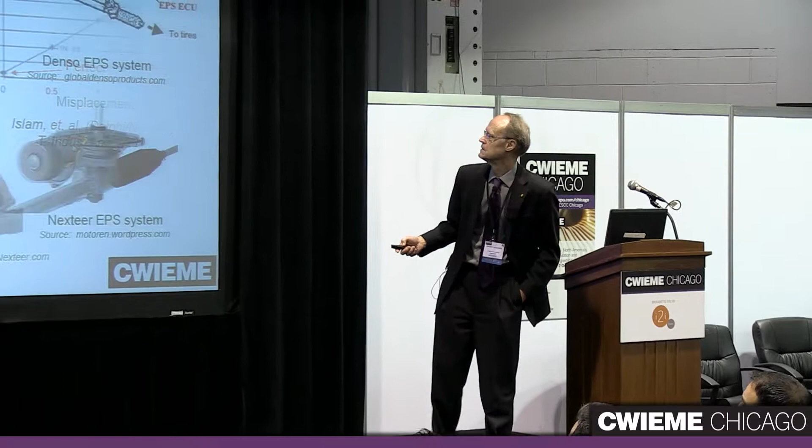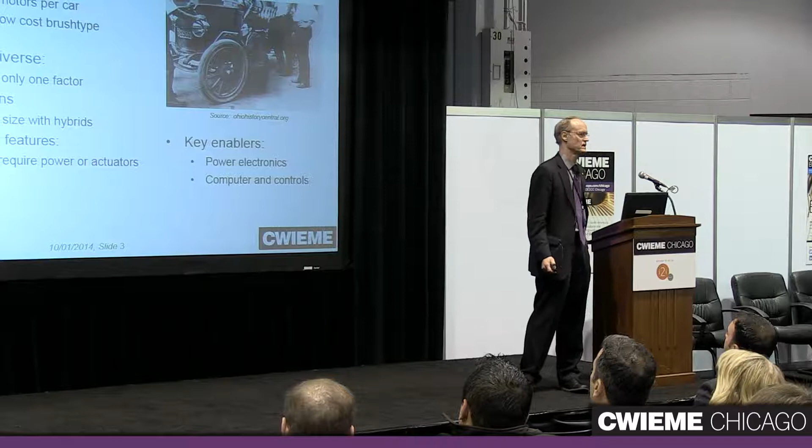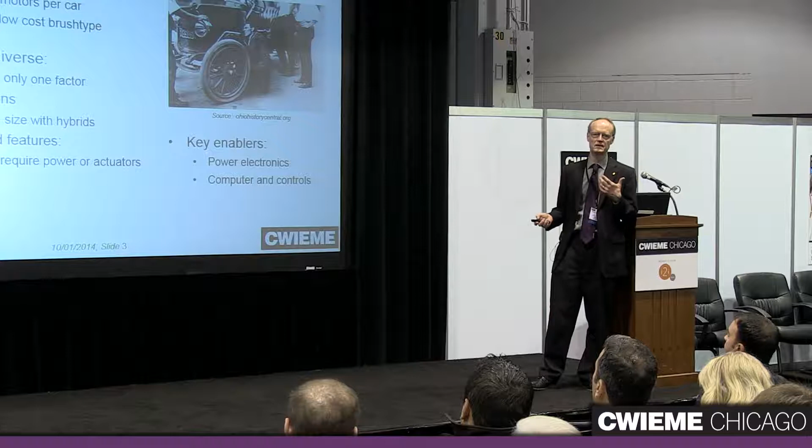Convenience and features motivate a lot of the electrification that takes place in the car. Up to now, there are a lot of small, very cheap motors. Now you are starting to see more sophisticated motors like brushless drives. And the key enablers really are power electronics and computing power.

In your car now, you have millions of lines of code. It's amazing how much computing power you have.

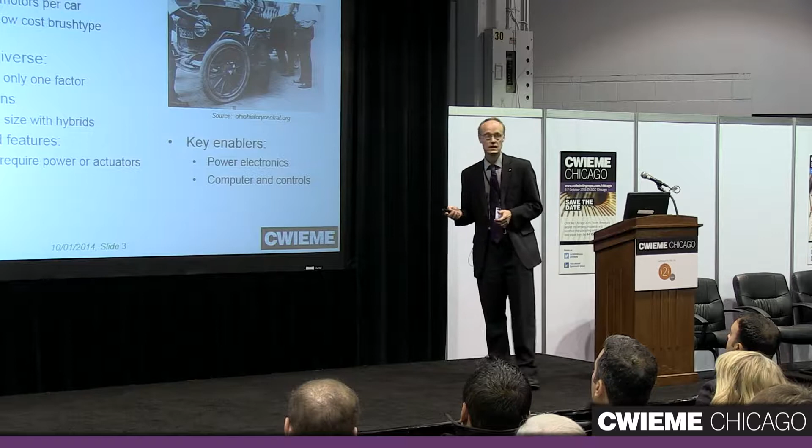So I'm going to talk first about everything else but hybrids, particularly chassis and powertrain electrification. What I mean by chassis is really steering, brake, and suspension put together, the handling of the car. All three were mechanical, and all three can be electrified to one degree or another. In fact, power steering now is pretty much standard electric. You don't realize it, it's transparent to the user, but it's a reality.

Looking at power steering in particular, up to recently, power steering was a hydraulic system that required the hydraulic pump to be on all the time as you are driving, even though you are not steering very often. So that's about a 1 mile per gallon penalty on fuel efficiency. That's a big deal. You have 20 miles per gallon and you are spending 1 on your steering system. So electric allows the power to be on demand.

So it started with small vehicles in the 90s, but it's really in the 2000s that it really took off. You cannot imagine the amount of work that went into developing this electric power steering. In principle, it's not complicated. You have a motor, a gear, power electronics, and then you rotate the system. You still have a linkage just for a fail-safe feature.

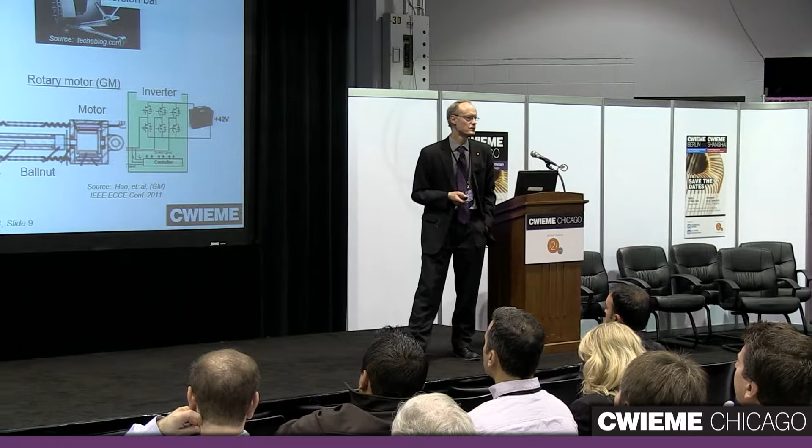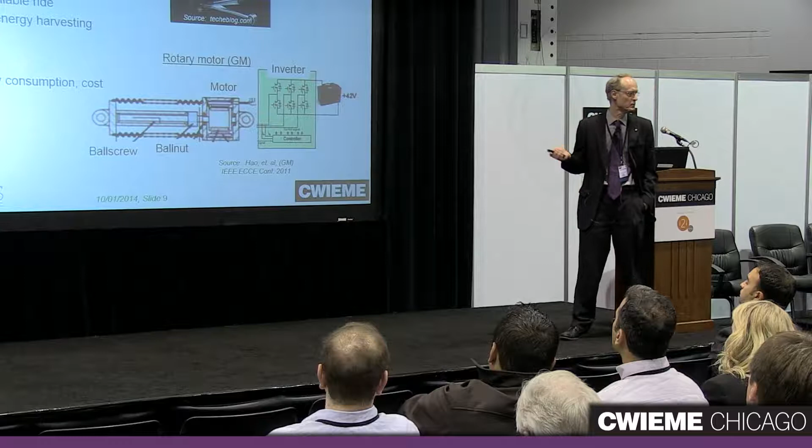There is work going on to go further, to have active suspension, where you have a motor that can move the car up and down. Bose is using linear motors. There are efforts in rotary motors that go way back, where you use a motor and a ball screw to either absorb the energy or to actually move the suspension, giving you an active suspension. These are wonderful cars to drive, but that does not come cheap, or at least not yet. So it will be a little while before it really happens.

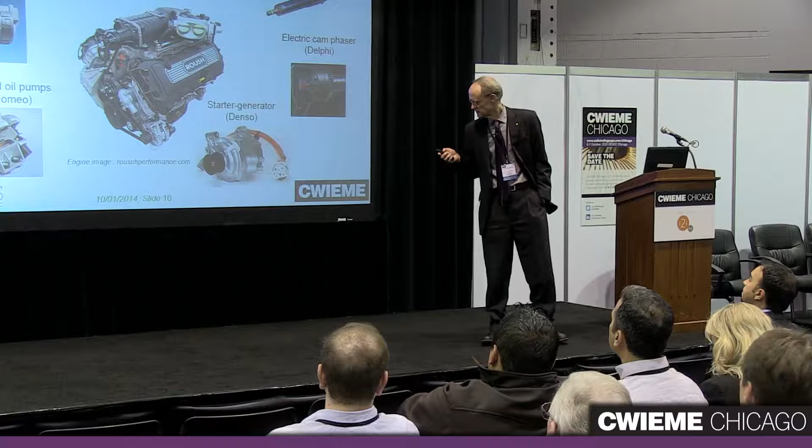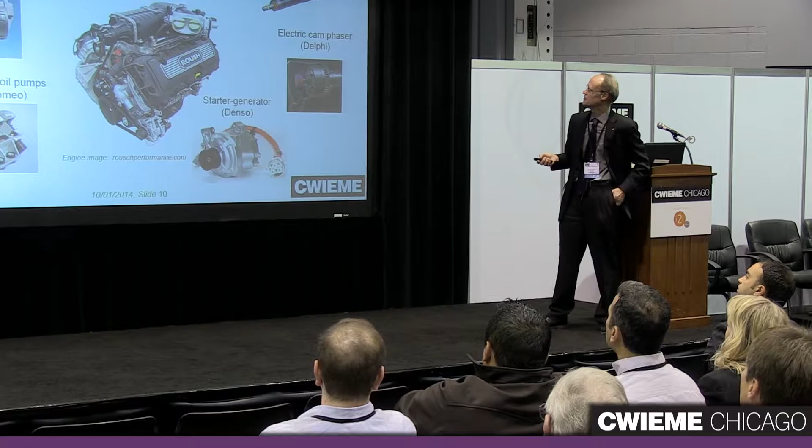Moving from the chassis to the powertrain, this looks very mechanical, but there is a lot of electrical stuff for those of us who are electrical engineers in the room. Some examples: first, the computer, a very powerful one. But then you can go around and see all of these components - the fuel injector, the cam phaser which moves the valve train depending on the engine load point, starter generators - you don't see those much yet - but water pump and oil pump could be electrified, which would allow some flexibility. And the electronic throttle control, which is the next thing I'll talk about.

Most people don't realize it, but when they push on the gas pedal, there's absolutely no linkage anymore to the engine. It's all by wire. You don't want to tell people because they would be all concerned, but, and safety is definitely a concern, it's all by wire. You have a pedal position sensor to sense how much you are pushing, and then a motor that activates the throttle plate.

The advantage is that you not only have the input from the driver, but input from the brakes, from the steering, and so forth, so you can have much better handling. Safety is certainly a concern because acceleration is a concern, and there have been some recalls for unintended acceleration. But at the end of the day, and it's not true just of throttle by wire, electrical systems can be safer than mechanical systems because you can have redundancy, sensors and computers that monitor what's going on. You have fewer components and less wear. And a funny thing, it's not subject to human failures - it will fail, but not because it's going to sleep or it drank too much last night.

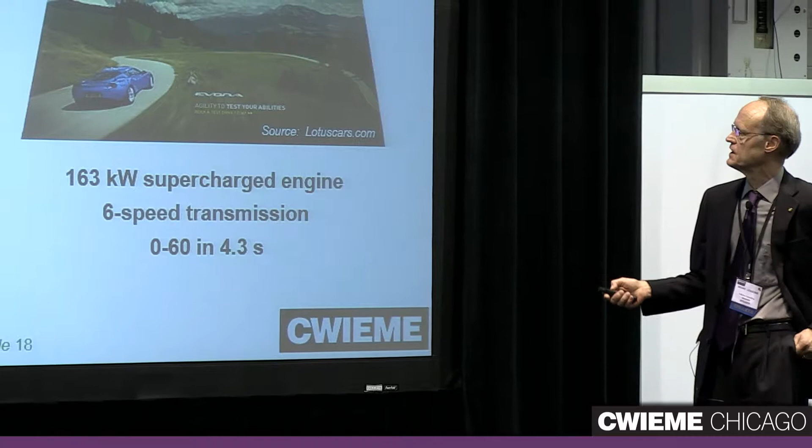Looking at larger hybrids, what took a while for people to realize is the performance you can get from electric motors—on par with, if not better than, a regular engine. In fact, the acceleration specs on the Tesla were meant to beat the Lotus Elise, which has the same chassis, to show you can get the same kind of performance.

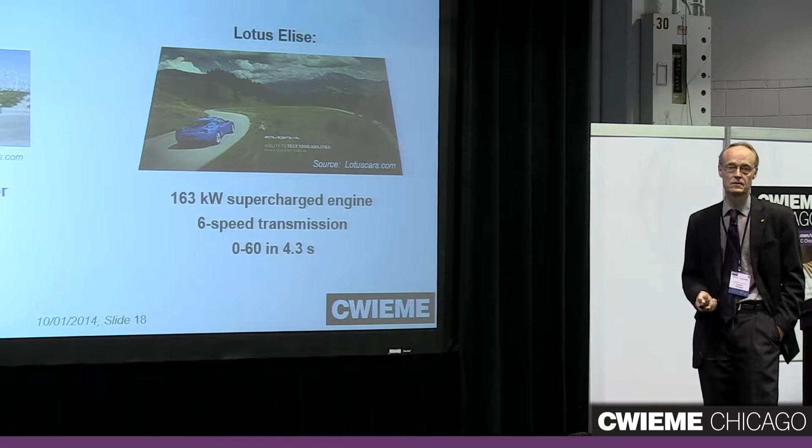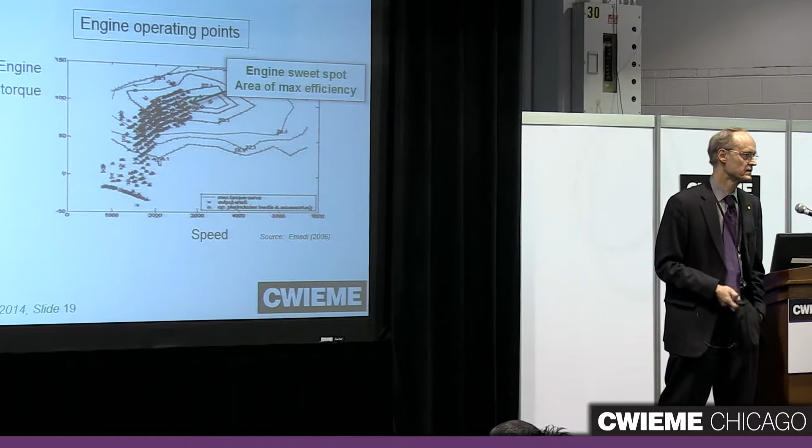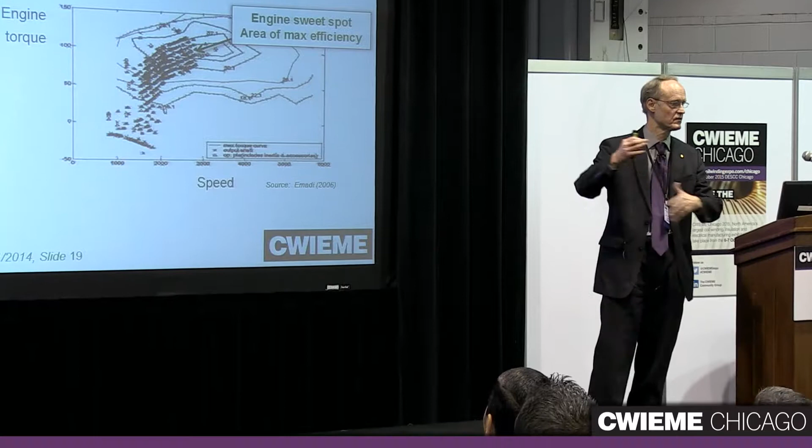The reason is simple: electric motors have torque right from the start, while engines have no torque at the beginning. In fact, an engine's torque-speed range is fairly narrow, which is why you need a transmission that keeps changing gears. An electric motor needs much less of a transmission because the torque is flatter. But the two are really a very nice complement to one another.

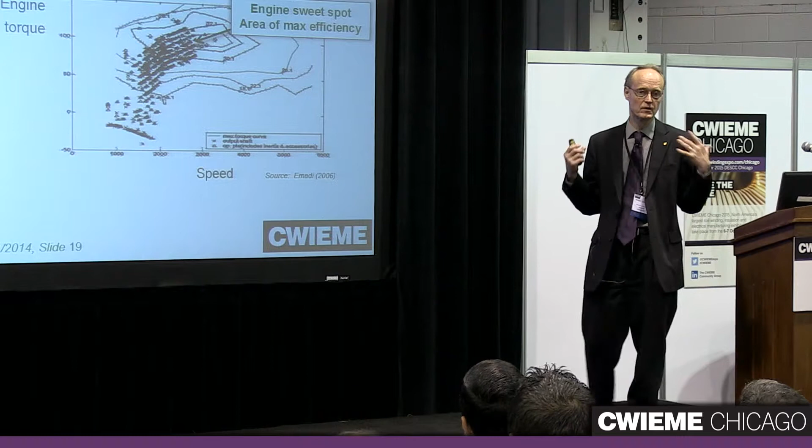You use the electric motor when you start, and you use the engine at its high efficiency point. So from a technology point of view, it's a very nice complement, and that's why hybrids can be very nice to drive.

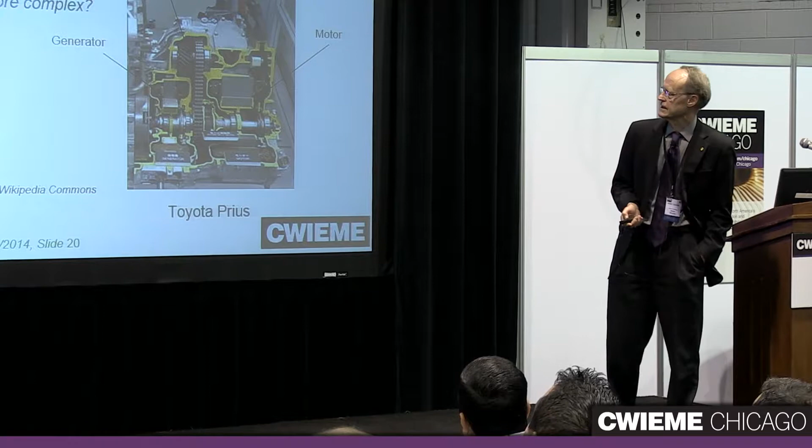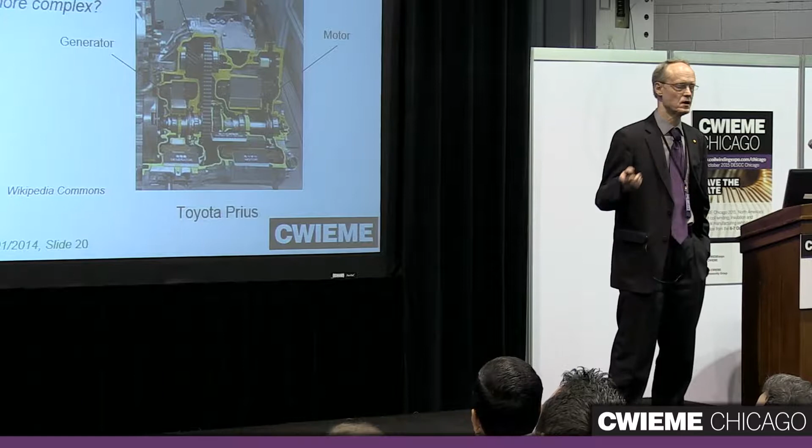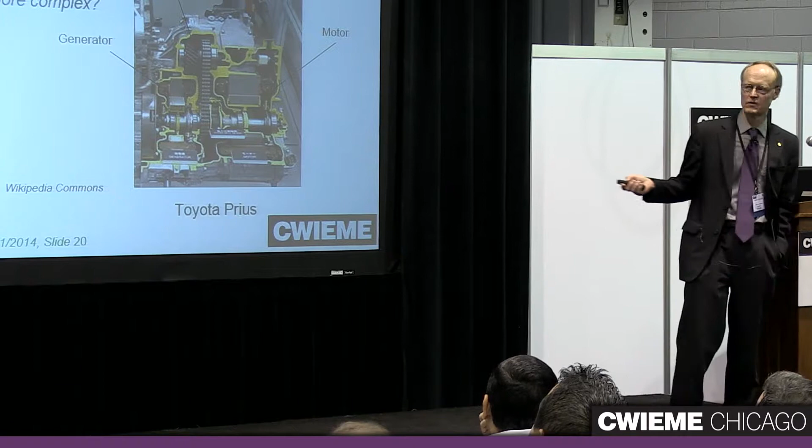Now, when you look at transmissions, that's perhaps another way to look at hybrid vehicles. Normal engines require a lot of gears, and they keep increasing the number—here's eight gears on this Lexus. When you look at the Toyota Prius, you get much less gears, just a couple of motors instead. You can think of hybrids differently, not as having an electric motor with the engine, but really as an electrified transmission, where you get rid of most of these gears and replace them with a couple of electric motors—another way to think about hybrids.

One important lesson that came out of the work on hybrids and electric vehicles is the importance of the load cycle. It's common sense - it's not very common that any of you have your foot to the floor. Maybe my son does once in a while when I'm not around, but most people don't do that very often. So what that means is the maximum torque of your powertrain is used very, very rarely. Most of the time you operate at very low torque and partial speed.